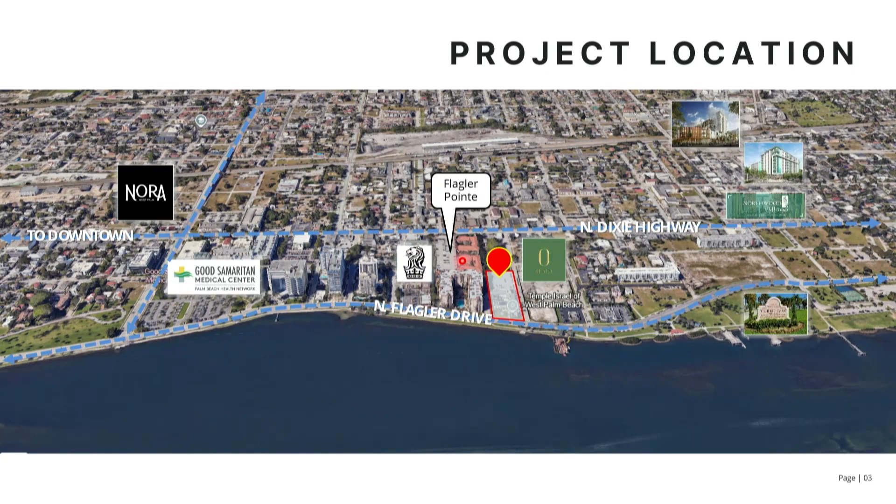So our request is a special review of a site plan for a 27-story multifamily building with 100 luxury residential condominium units, not apartments, together with a 5-story, 204-space parking garage, and 6 variances that I am going to walk through one by one with you after you've seen the architectural portion of it.

Here's the building, here's the 5-story garage. This is Pine Street, which runs east-west from Dixie to Flagler. It's a fairly narrow roadway, about 30 feet in width. This is Flagler Pointe, our neighbor to the south, and our neighbor to the north, just off screen, is the Olara project under construction.

Let me walk you through the site plan at a high level before I turn it over to the architect. The footprint of the building is here, but the footprint of the tower is under one-third of the project. Most of this is parking garage and mechanical. The resident and guest ingress and egress is off of Flagler. There is a loading and service ingress egress onto Pine Street.

I'll call your attention to this public open space. On the west side of the project, you'll notice a black hash line running down the center of it. Everything on the east side is part of the site plan you are considering tonight and is open space to buy up on the height. If you recall, CMUD has a height chart. You have a base height of 111 feet by right, and if you're in Core 1, you can buy up another 195 feet to a total of 306, choosing from a menu how you elect to do that—usually a combination of many of those menu items.

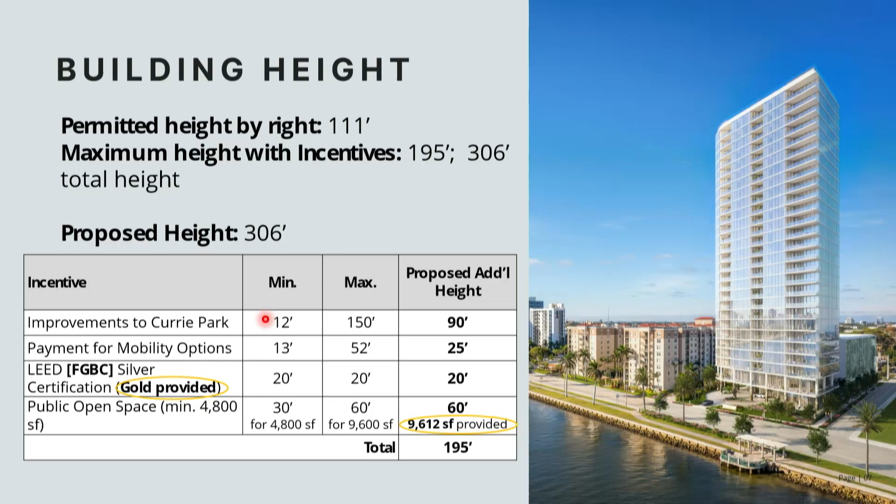And our public open space, as I already alluded to, in return for creating 4,800 square feet of public open space, you bonus up another 30 feet. We can only use the 60 feet, but we provided double the public open space.

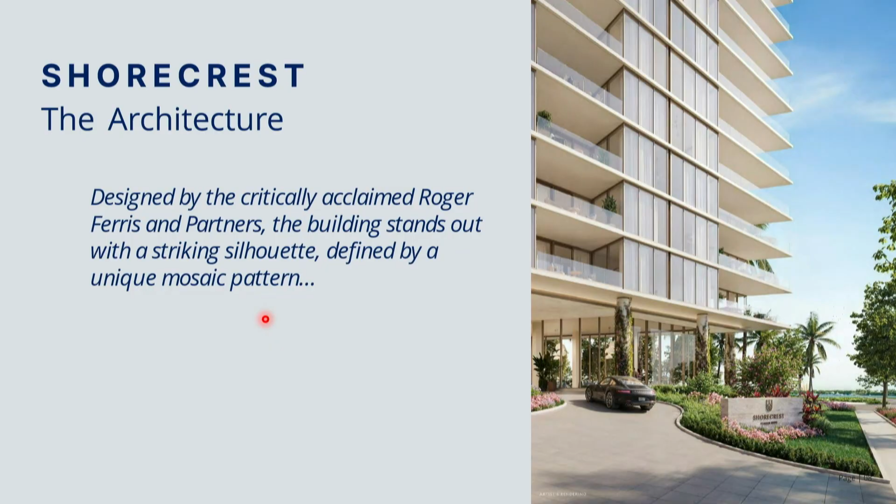So with that, I'm going to stop here and invite Breen Mahoney, who is the design architect from Roger Ferris, his firm, to walk you through the more interesting part of this, and then I'll come back with the much less sexy version of the presentation, which is walking you through 6 very technical variance requests. Thank you.

My name is Breen Mahoney. I'm the managing director for the commercial portfolio at Roger Ferris and Partners. We're the design architect for the project. We're working in collaboration with Revelta, who is the architect of record, and together we're putting forth the design I'm going to walk you through today.

The building itself, the project is comprised of 3 main components. Harvey touched on this a bit. In the forefront of the image here, you have a slender residential tower, that is the main component of the project that fronts the Lake Worth Lagoon. Just behind that, you have the second component, a low horizontal parking garage that fronts Pine Street. And the final component is the public open space, which also fronts Pine Street on the west end of the property.

The building as a whole is articulated as a sort of modified parallelogram in plan, with a gently curved facade aiming towards the southeast, a dynamic corner, as you see here in the foreground, anchoring Flagler and Pine Street.

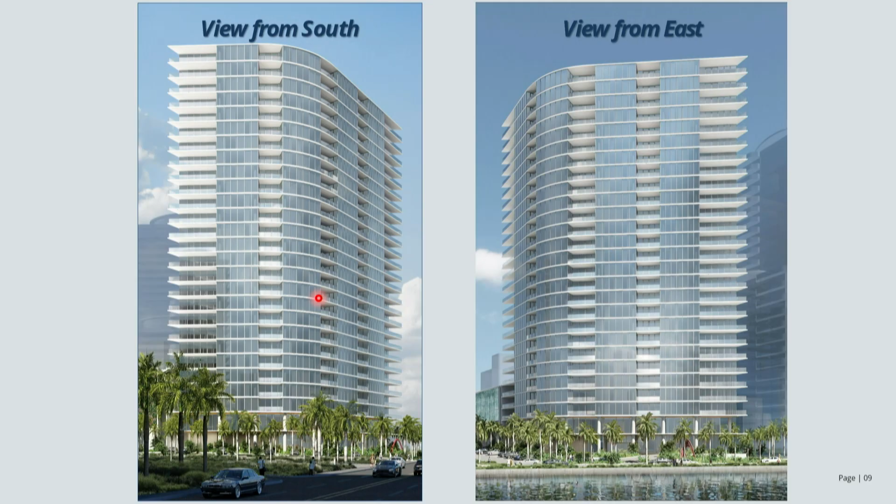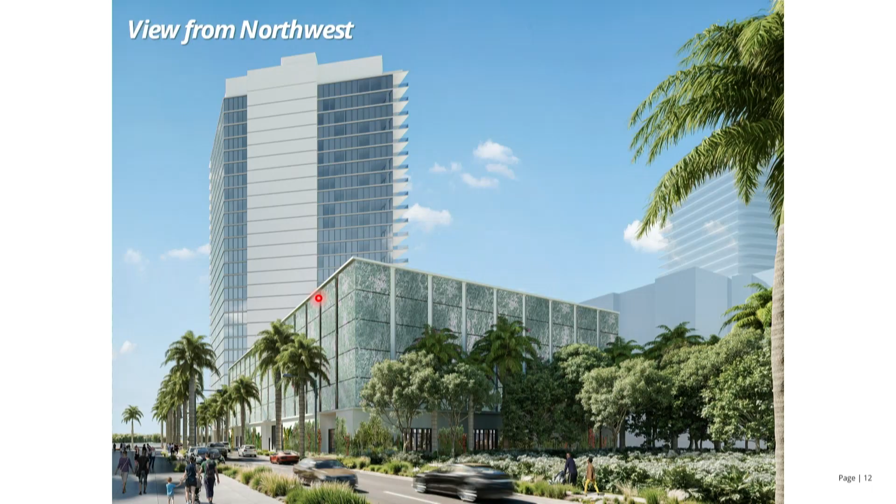This is a view taken on Pine Street looking out towards the waterway. In the foreground is the open space envisioned as a public amenity, as Harvey walked through, very lush in its landscaping. The garage itself is articulated by a graphic screen.

It's a mesh composition that has a fairly pronounced graphic image on it. The base floor of the garage is finished with plaster, as is the framing around the parking garage that holds the mesh screens. Landscaping continues down Pine Street in a couple different forms.

There is a ground plane of landscape, and of course the street trees mandated by the city. As you can see on the building face at the ground floor, we have a vertical expression of that landscaping in the form of vines, softening the way the garage lands on the ground.

What's also visible here in the trees is an active face for the back side of the garage, which is actually not loading or parking. There are some very targeted building amenity spaces positioned against that to promote a little more interaction between the building itself and the public open space.

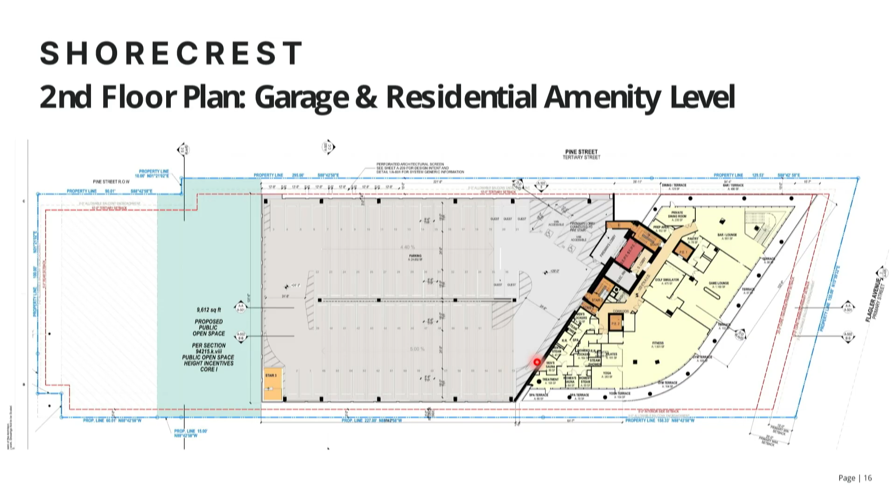Residences start on level 3. There are 4 residences per floor of the tower. One that anchors the northeast area of the plan, one that anchors the southeast area of the plan, and 2 in the center. Again, behind that, you see the layout of the parking garage.

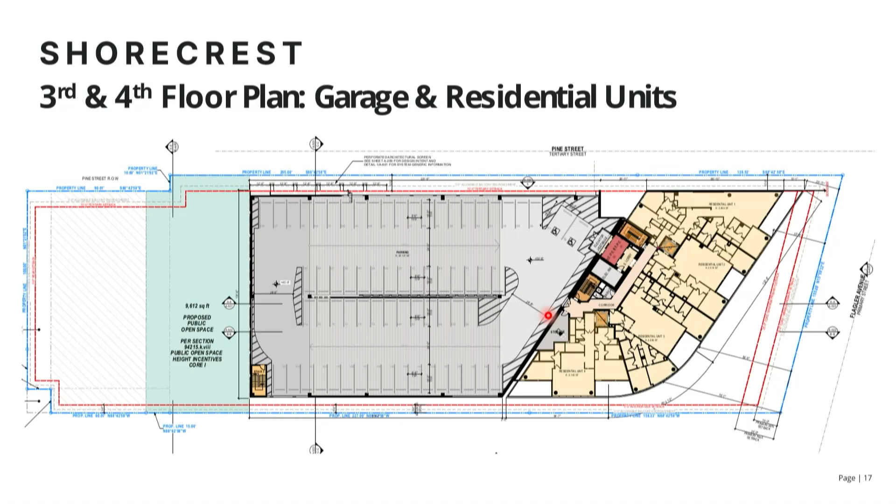The top level of the parking garage does incorporate some mechanical space that is tucked into an embedded mechanical well and is not visible from the public realm. It is screened on the two exterior faces of the building.

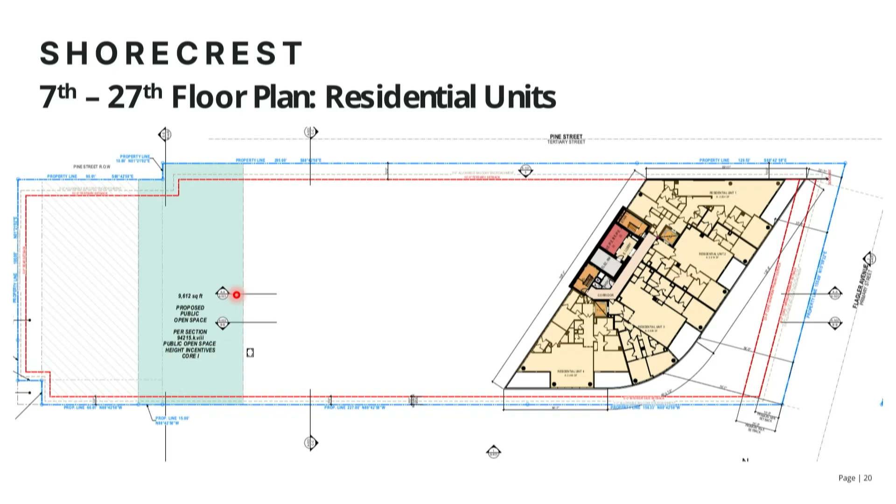The enclosed portion of the roof encloses things like air handling units, supportive spaces like bathrooms, etc. There is no internalized conditioned program space per the zoning regulations. I should also mention that the rooftop itself, as you see in the submission, is significantly landscaped and meets the criteria for the greening of an outdoor roof space.

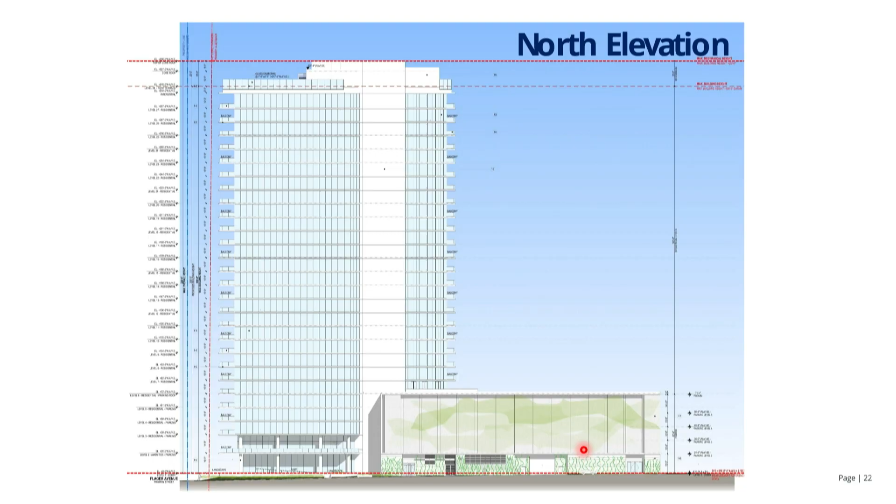I'll just go around the building here. The idea of the integrated terraces is in direct response to the nature of the zoning for West Palm Beach, creating active—not just in terms of programming, but in terms of the interplay of facade elements, recessing and projecting—to meet the criteria of the planar break.

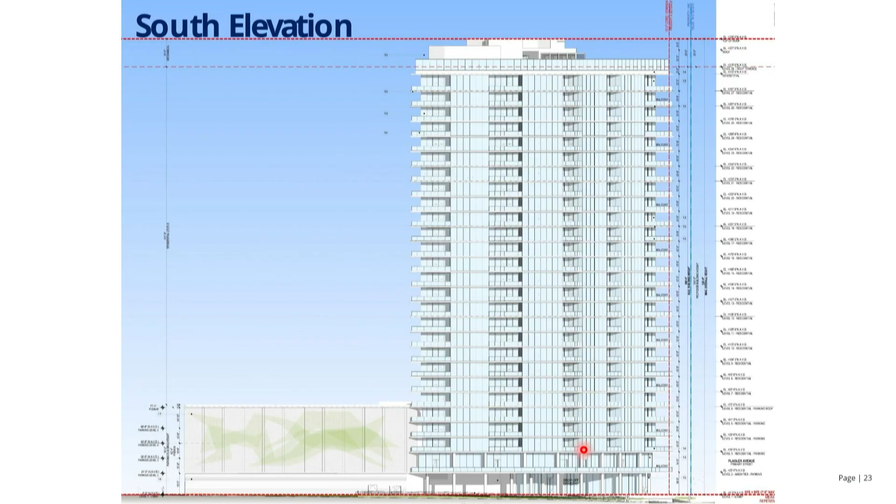I think that's me. Thank you very much for the opportunity.

Anybody have any questions of the architect?

I had one question about the material of the screen device on the parking garage. Sure. You said, was it a fabric screen? It is. It is a mesh fabric that is essentially stretched across the facade itself vertically, if you will.

It will be segmented. We're working with the manufacturer now to figure out exactly what that module is. And the limitations for the graphic expression are fairly limitless. Essentially, we're working on the design. What you see here, this idea of a muted, colorful abstraction to provide some animation on the street, that's the intent of it. And we'll work with the fabricator to translate that into a final design.

So this would be, I guess, like the public art component of the project with the—? No, this is just the design for the parking garage. The public art element, and I think Harvey can speak to that more directly, is not in this location. Okay, but this is not the final design, what you're representing? It is representative of that.

Just from the technology we have and translate, it is going to look more or less like that - kind of like greenery and vines. The idea is that we're quite sensitive; it's not implying actual greenery on the facade. That's not the intent. But we do want to reference something that feels organic, something verdant in coloration.

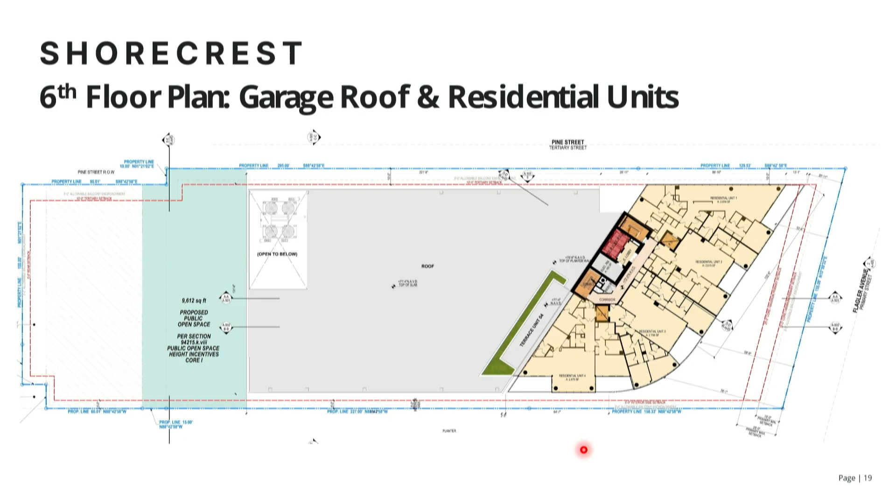It is meant to be reflective in terms of resisting a heat island effect, so it doesn't contribute to the neighborhood - not reflected in the sense of causing undue hardship on neighbors. Just want to clarify that.

Can you talk a little bit about the public space? Is it only accessible from Pine Street, or is there access from the building to the open space as well? Give us some detail on that.

The answer is yes to both. It is fully accessible off Pine Street - the two pathways come right off the sidewalk and bring you into the full depth of that space. There is also accessibility for residents of the building going out to that green space.

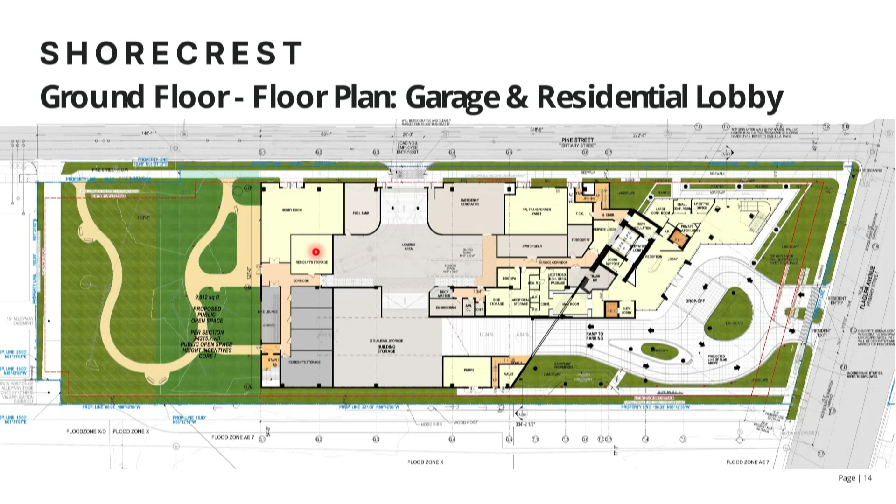In terms of what the park's going to contain, it looks like a walking path, some benches - are there any details on that, or is it even part of the specific requirement for what it has to have?

There is a much more in-depth landscape plan submitted by DS Boca. Here you can see the intent - it's a mix of scales in terms of vertical trees, lower planting elements around the perimeter of the park, and pathways, helping to create and form these outdoor spaces.

Is it like a 24/7 park - is it gated or totally open? I'll let the client speak to that directly, but in our design discussions there's been no desire to gate this - it's an open space.

And then maintenance - who's required to maintain that? Is it being gifted to the city, or is it still owned and managed by the property? That is my understanding, but that's not for me to speak to - we can have the owner speak to that. Harvey can answer that one - they will maintain the park.

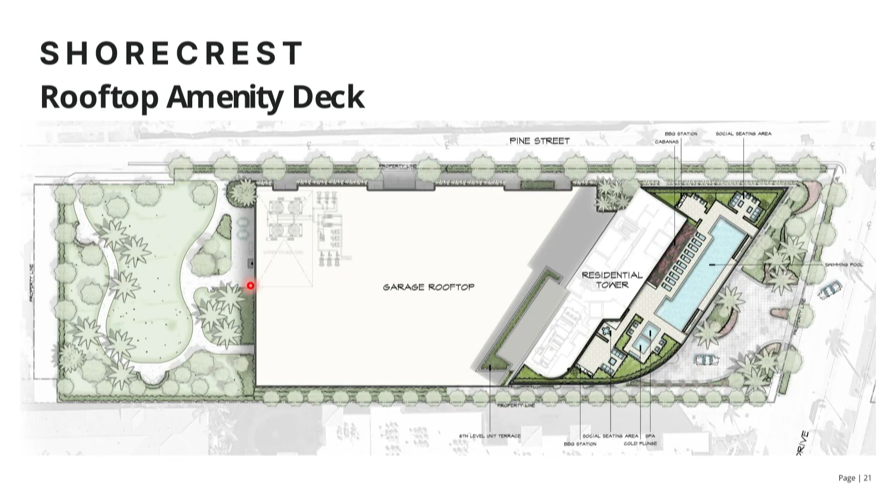Okay, no further questions. Great, thank you so much. Thank you.

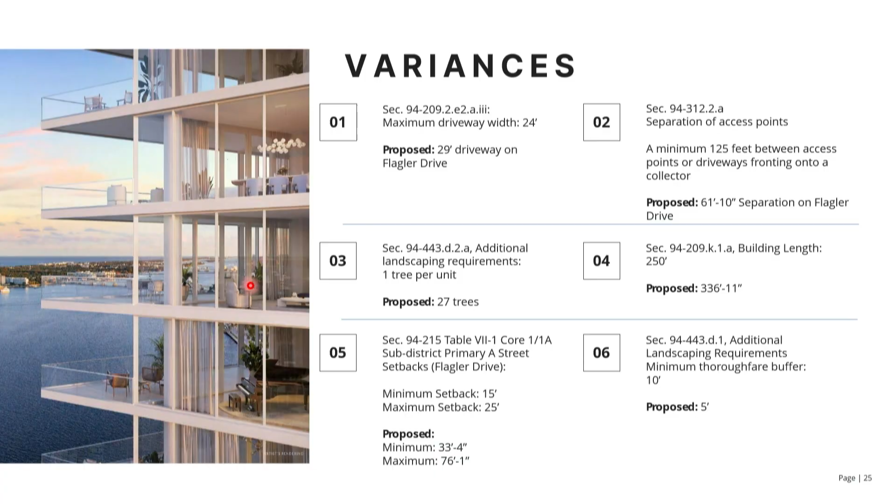Thank you, Breen. Now we're going to do maybe the less exciting part than looking at his beautiful images. So we have 6 variances. I'm going to walk through those one by one. And incidentally, a couple of them do not match up in the same order as the staff report.

If you're following the staff report, one of these is in a different order. The first 2, and I've clustered these together because they occur right next to each other, variances 1 and 2 are both along Flagler Drive. Variance 1 is a separation requirement from other driveway access points. The code requires, at least in this part of the city, 125 feet of distance between driveways. We have Flagler Point North access point here. Flagler Point, incidentally, has 3 access points, 2 on Flagler Drive, 1 on Dixie.

Given the distance of our property, which, as I mentioned at the beginning, is 155 feet in width along Flagler Drive, we cannot comply with all parts of the code. Let me give you an example. We have a 50-foot separation requirement from Pine Street and a 125-foot separation requirement from our Flagler Point's north access point. That's 175 feet of requirements. Even before we cut a driveway in, you mathematically cannot do 175 feet and 155 feet.

As you well know, this is not an uncommon problem. In fact, I'm not acquainted with any residential project on North or South Flagler Drive that didn't have a variance or a waiver for driveway separation, including all the ones that have come in front of you. Olara, the project behind us that runs along the south side of Pine Street to Dixie, the Ritz-Carlton, Family Church, Forte, South Flagler House, Bristol, all of them, the one that you approved last spring, the Coulter Perco project on South Flagler. I'm unfamiliar with any project on Flagler Drive that has met that.

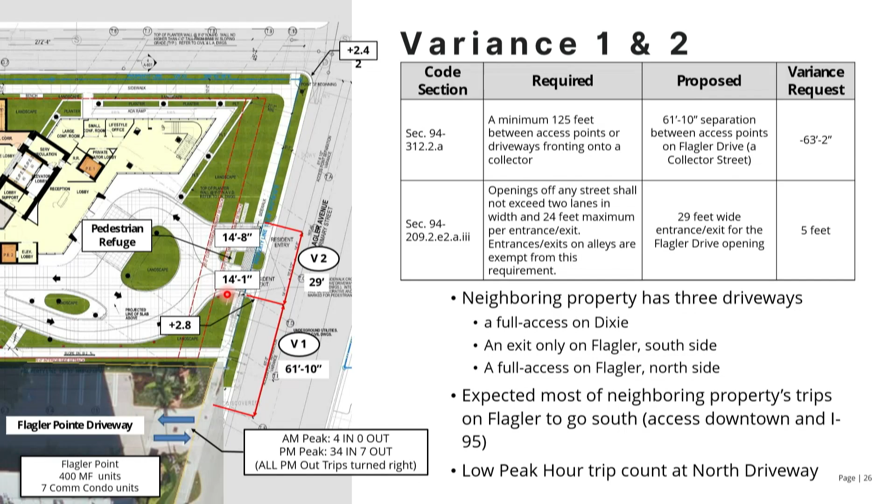And this is just reiterating what I already stated. And this is what it looks like. Breen gave you a similar image, but effectively you're at 2 feet here, and you need to be at 9 feet finished floor in that amount of distance. That's nearly impossible to do and meet the code sloping requirements if you did it up near Pine Street. Moreover, moving it closer to Pine Street gets you in conflict with significantly more traffic.

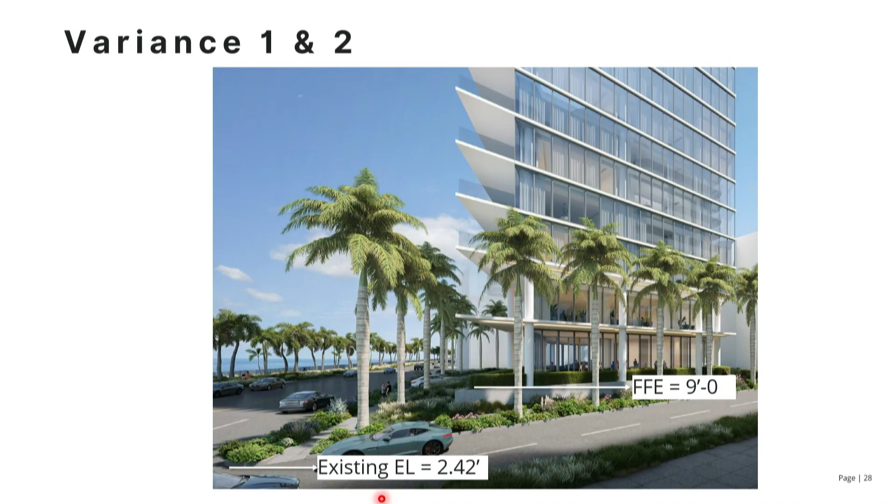Variance 3. The code states that for multifamily projects, in addition to your foundation landscape plantings, in addition to your landscape buffer, and in addition to your street trees, you are also required to plant 1 tree for every residential unit that you're proposing. So in our case, 100 residential units, 100 trees on top of those other 3 landscape requirements. That cannot be done in this amount of real estate. And I'm not aware of anyone who's accomplished that on any of these multifamily projects.

This is what it would look like—an orchard. We're proposing 27 trees. I'll show you where those are located, resulting in a variance request of 73 trees.

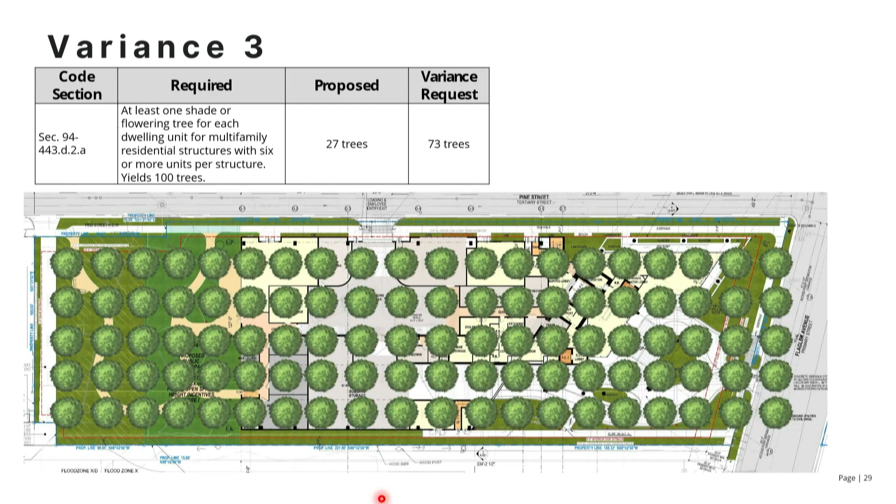Now you are probably wondering, how did everyone else comply with this? Absolutely no one, to my knowledge, has ever complied with this. Let me give you examples. The Ritz project needed 158 trees. They provided 46. No variance was required. Staff didn't require it—a different reviewer at the time, I believe.

Jeff Greene's project in CMUD, 152 units, did not have 152 trees. Again, staff did not flag this as an issue that required a variance. Olara has 458 units, not anywhere near 458 trees—again, staff never flagged it. The Spruce, just outside of CMUD and in Mud, 270 units, again not flagged by staff. And the project behind us on Pine Street, same issue. It's always been in the code. Not sure why it wasn't recognized previously. We seem to be the first instance in which that portion of the code has been applied.

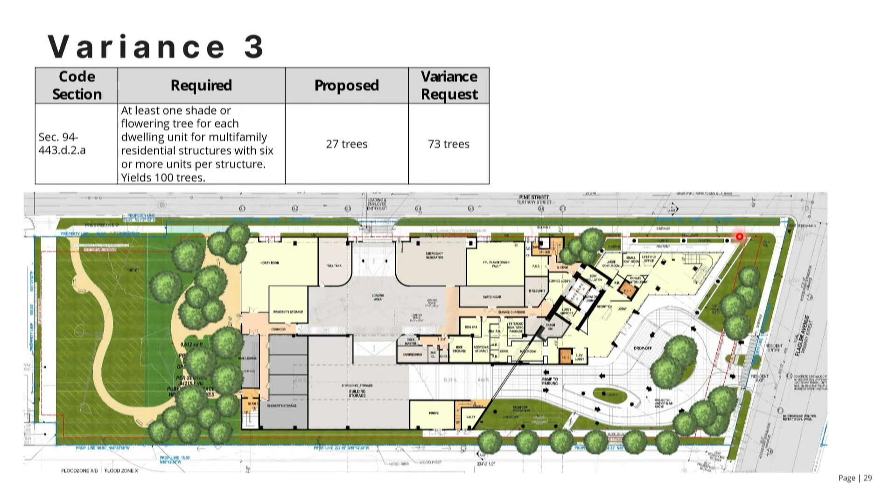But I want to show you why that does not work on this property. So our site plan only includes the east half of the public space, so we can only count these trees, even though, as you saw in Breen's image, there are trees here. We cannot count them because it's not within our site plan. So this is where we're proposing our 27, and these are substantial trees.

And this is the other landscaping. These street trees in the swale area between the sidewalk and the road are required trees, as are the foundational plantings and the landscape buffer between our neighbor. We have to comply with these additional trees in addition to those other three layers of landscaping.

So quite frankly, there's not the real estate to do it. If you look at where else we could do it, it would be in this area, but this is our utility area. If you put larger trees here, the root balls would interfere with the utilities and the canopies would overhang them. So we have very few opportunities, which I've outlined in orange.

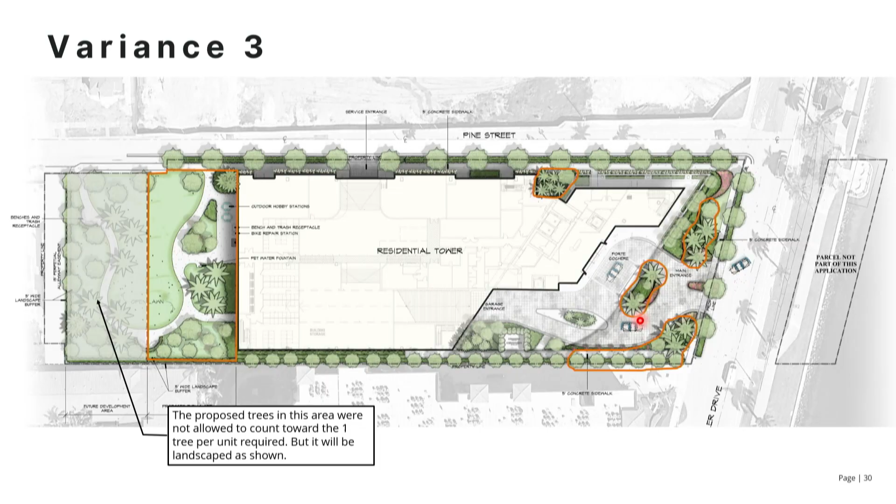The fourth variance we're requesting is a building length variance. CMUD limits building length to 250 feet. In some codes, if you put an inch of separation between buildings, you get to start the calculation over again. Many codes have a minimum distance — for example, our downtown has a 5-foot planar break before you start a new building. In CMUD it's a substantial separation requirement: 30 feet between buildings. Otherwise they are conjoined and made into one building.

Obviously no one has done that yet, and every one of our peer group projects in CMUD that you've already reviewed and approved all had a variance for the 250-foot building length.

But I want to make a distinction between the tower length and the garage length, because the overwhelming majority of this variance request comes from the 5-story garage. We had a design that actually met the 250 feet, but that triggered a taller garage. On balance, working with staff, it made more sense to seek this variance, which staff supports, push the garage down and squeeze it out wider. It preserves views for our neighbors to the north, Olara, and to the south, Flagler Point. So this seemed to be in the best interest of the entire community.

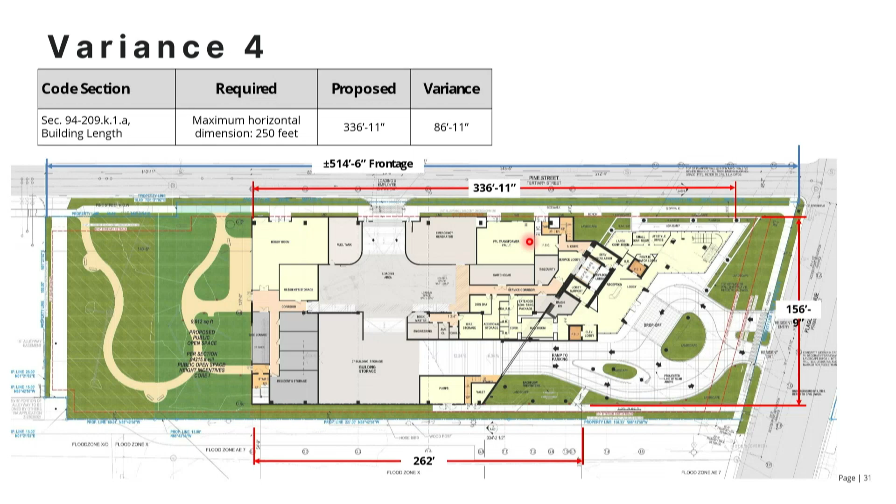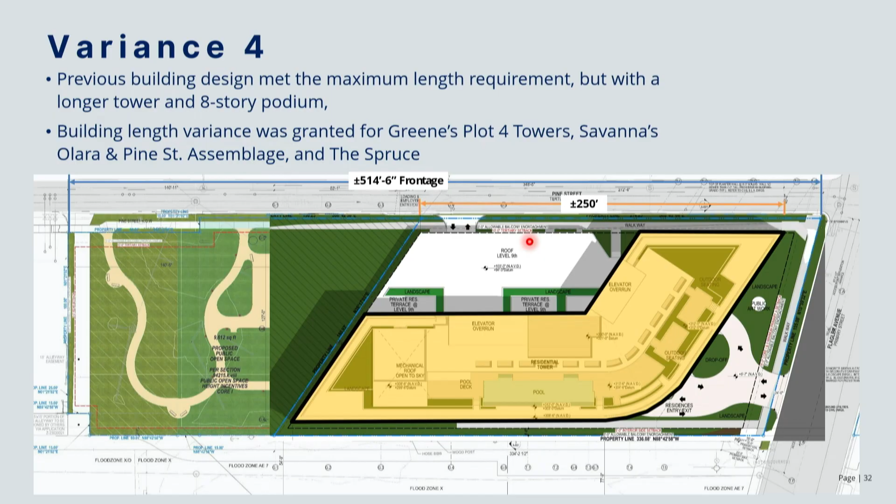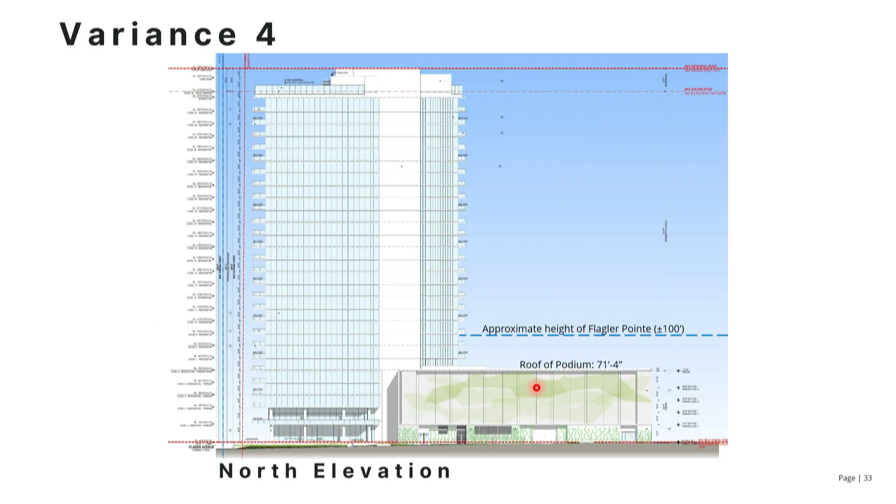This was the 8-story version, a much bigger tower, from when we had double the density and an 8-story podium. This is what it looks like as a 5-story, squeezed out in a horizontal fashion — it allows all of this area to now be open, call it 30 feet of openness above the 5-story garage that would not be there if we built the 8-story garage. Not to mention how inefficient it is to have a smaller footprint garage.

This is looking at it from Flagler Point, so that 30 feet would be somewhere in here. They're a 100-foot building, so we've given them 30 feet of height on the top.

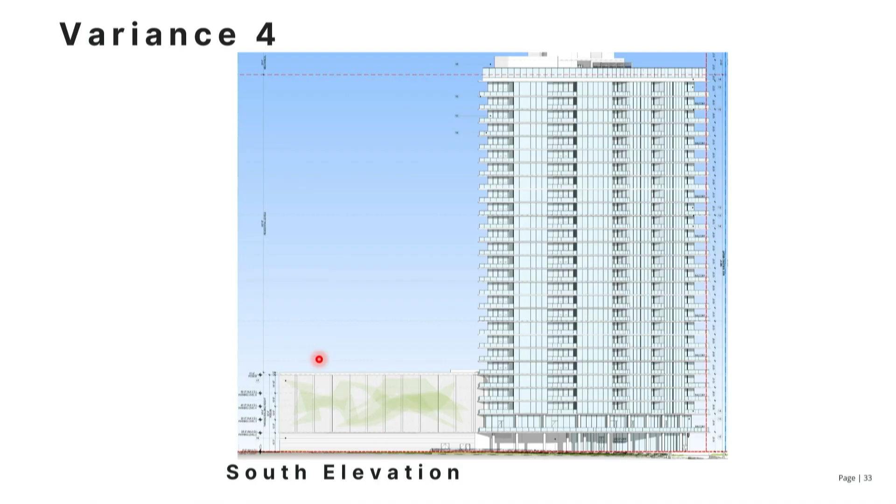Variance 5. Now this is a little confusing — if I lose you, stop me. This CMUD, when it was enacted, particularly for Core 1, was generally focused on Jeff Greene's properties to the north, which is the substantial part of CMUD and of the Core 1 zoning. That was envisioned as an extension of Northwood Road, 25th Street, heading towards the water, an urbanist form-based philosophy of buildings right up on the street edge with ground floor retail, almost like our downtown master plan. It certainly didn't contemplate being outside that area or being on an angle like Flagler Drive — it contemplated rectangles and straight lines.

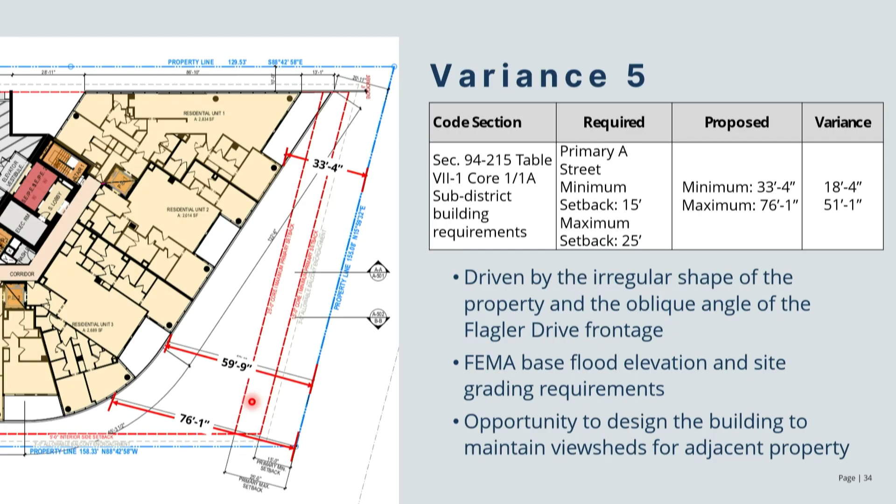And Variance 6, this is perhaps the most confusing to follow, so please stop me if this confuses you. Most properties, the property line is on the inboard side of a sidewalk, and the sidewalk and swale space out to the edge of road is usually in public ownership. Let me see if we can highlight this.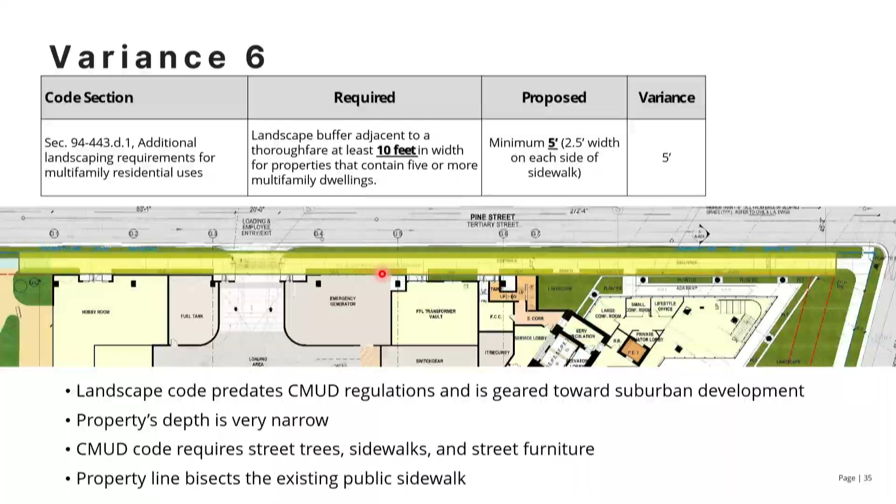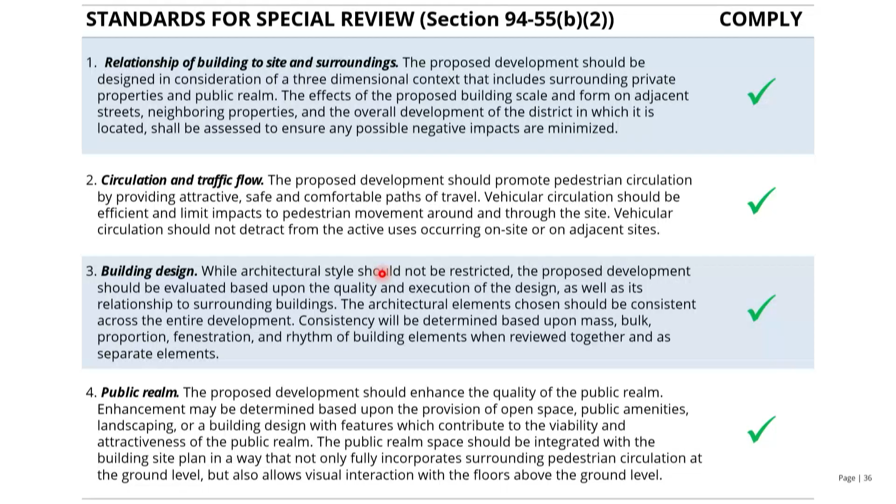So your standards of review for this evening, you have 2 things you're voting on: the special review, and you're the final arbiter of this. The standards for your review are found in section 94-55B, as in Bravo 2. We believe we comply with all of those standards, and staff concurs with us. Your standards of review for variances are found in section 94-38D, as in Delta, subsection 6. We believe we comply with all of these. I'm happy to go through them if you'd like, but in the interest of time, we'll come back to them if you have questions. Staff concurs with that.

We've had substantial public outreach over the last 2 years. As you know, this is just our outreach with our neighbor to the south, Flagler Point, because they were the most affected. They were the tallest building in the neighborhood for 30 years, and now they're going to be the shortest building in the neighborhood because they're being built all the way around.

And as you can imagine, that engendered some concerns on their part. So we met with them more frequently, including twice in the last couple of weeks, to share not only the rezoning concept originally, but all iterations of our site plan, construction management agreement, so they know when we're building, how we're screening, et cetera, so as to not disrupt their lives or minimize it as much as possible. We've done public outreach with our other neighborhood groups, Pleasant City to the west, all the Northwood districts to the north, and of course our Chamber of Commerce.

And we're delighted to tell you that the overwhelming majority of our neighbors support us, as they did for the rezoning 2 years ago. Staff is recommending approval of our site plan as presented this evening, with all 6 variances as presented this evening. They did attach some conditions of approval, and we're in agreement with all of those proposed conditions. So with that, Mr. Chair and Planning Board members, we respectfully request your approval of the project. We stand ready for questions.

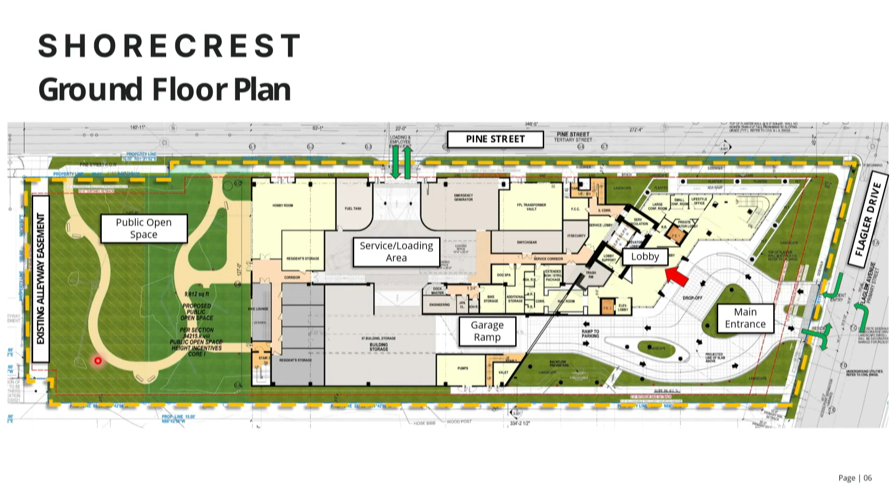Yeah, but I think Sam's asking, why did we not include this in the site plan? Do we know why that was not included? So we're assuming 9,600 square feet of public open space to count under height incentives, right? Yes. And I'm not sure what that is.

Mr. Fish, why don't we get back to you with an answer on that? I'm really not sure why it was excluded from the site plan.

The developer will initially, and once turnover to the association occurs, it'll be the association - very similar to what the Bristol has on the north side, that open space along the seawall. It's their obligation to maintain it, light it, secure it. That would be our obligation.

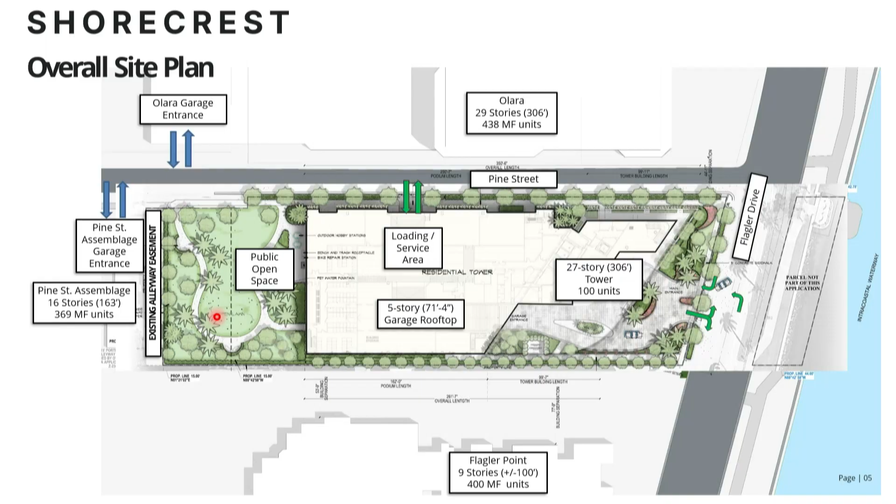The alley itself—why that exit point is there—I'm not sure the applicant has a picture, but I think I have one. Let me show it.

So the project to the west of this that was approved has an existing alley that runs east to west from Dixie Highway all the way over to the edge of the property and actually goes past it. You can see that little indent there by what appears to be a parking lot.

So the applicant to the west requested to abandon that alleyway. The issue was they were required to pay the value of the alley to the city. They did not do that, so that approval went away. So now that access easement that you saw on the park drawing has to remain. There's one there now so that the alley is not a dead-end alley.

That is why that's there. If that alley ever gets abandoned, then this easement would be abandoned and the current applicant, Related Ross, would be able to do something on that piece. So there's a lot of things on that western part of this property that cause it to currently be not a viable developable piece.

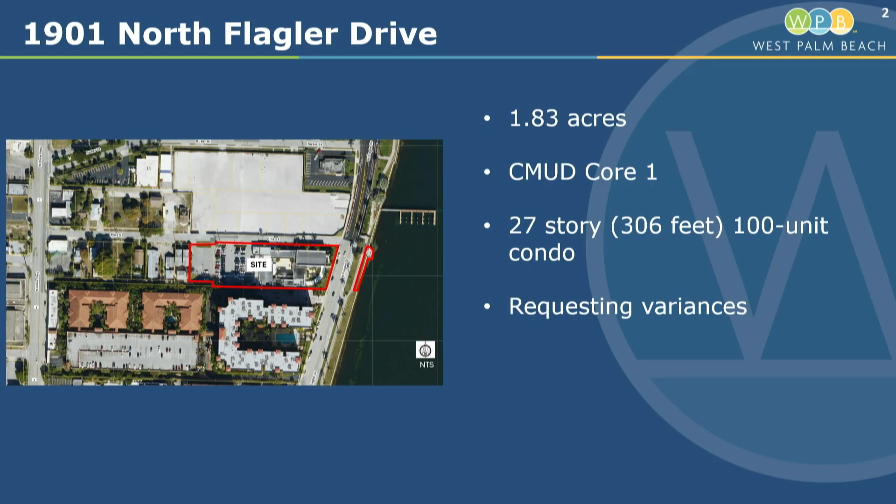However, the applicant could come back in and develop this in the future. Obviously, it looks a lot better with the path going in and out and all that landscape there. But in order to preserve the ability to develop that piece in the future, and then not have to rip out the trees that they've shown on the landscape plan, they're not counting those as part of the 100 trees that they are required to have.

If the applicant wanted to, because they are required to sign a perpetual public open space agreement for that area, maintenance and everything else, if they wanted to include both halves of that with a dashed line there and restrict that forever as more public open space, then they could count all those trees that were put on there. But that is not what was expressed to staff. Therefore, the trees on that piece can't count towards meeting the tree count because they could go away at some point. So that is an option the applicant has, but did not choose to pursue.

As far as some of the other items, the staff does agree that the variance requests and the variance standards have been met, as also the level 3 special review standards. That's all outlined in the backup material that you have.

I do want to point out that, and I think Mr. Oyer touched on it a bit, there are two variances that are a little different, and they're actually less variances than were in the backup material. The first is the length of the building. I have a snazzy image. Let me go get you a snazzy image.

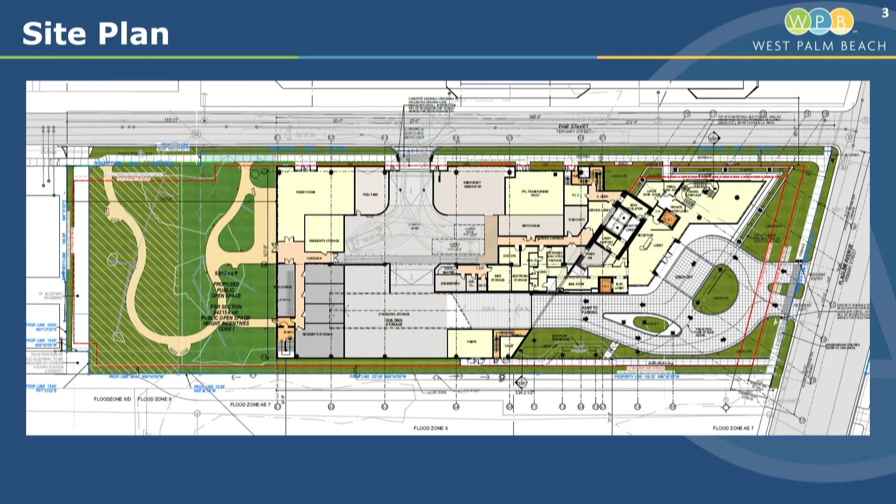So this is actually the north elevation, and the 336 feet 11 inches is measured from the furthest west projection of the garage to the face of the building. Originally, in the planning board report, the applicant had stretched that out in their measurement to include the balconies, but the balconies are not part of the building. And as was discussed, as the building slopes backwards, that actually is the furthest projection. The little balconies there are just a little point, if you remember seeing the elevation drawings and floor plans. So there's actually less length of building than what was listed in the report, so it's less of a variance required.

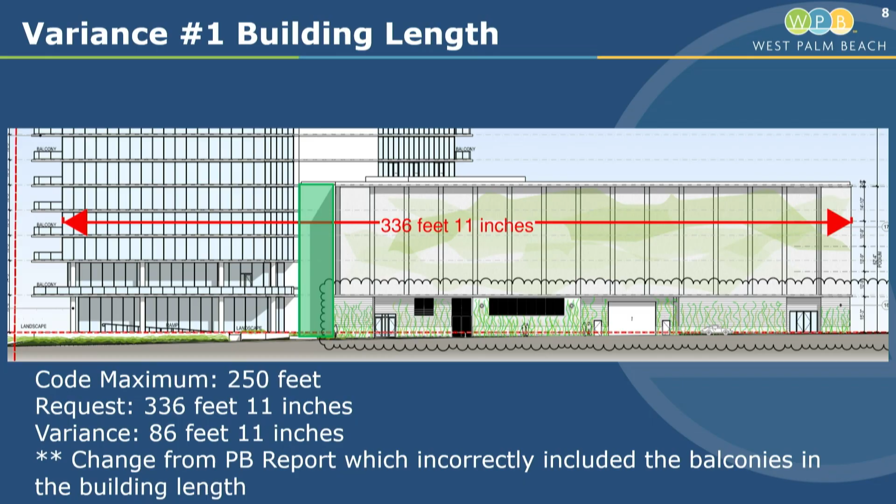I do want to point out, I know Mr. Oyer touched on it, that it is broken a little bit, but this area here that I just popped up in green is actually a recessed area from where the building slopes back. I don't know if you picked up on it on the site plans. So it is not a flat projection at 336 feet 11 inches long. It is less because the garage is built separately, even though it's connected from the tower where it slopes back there.

The other variance I want to point out that's a little different from what's in the report is the distance separation. The applicant's engineer was able to tweak it a little bit and look at that driveway location, and they were actually able to move the driveway one foot further away from the property to the south, from the driveway. So in the backup material it's 60 feet 3 inches, and it's actually 61 feet 10 inches away. So it's less of a variance than was previously requested.

So those two are the two changes from the variances that you will be voting on, and I just want to put that in the record.

I don't have anything else other than to say, yes, staff supports this. We did find that the variance standards and the special review standards are met.

Can you repeat that distance again, Eric? In the backup material, you see the little red lines, that's the distance separation, and Mr. Oyer had mentioned that because of the geometry of the lot and those code requirements, there's physically no way to meet that. It had been 60 feet 3 inches in the backup material, but the applicant was able to shift that driveway a little bit, so now the variance is at 61 feet 10 inches, the driveway separation is 61 feet 10 inches, so 1 foot further away from the driveway to the south than what was in the backup material. I just want to point that out.

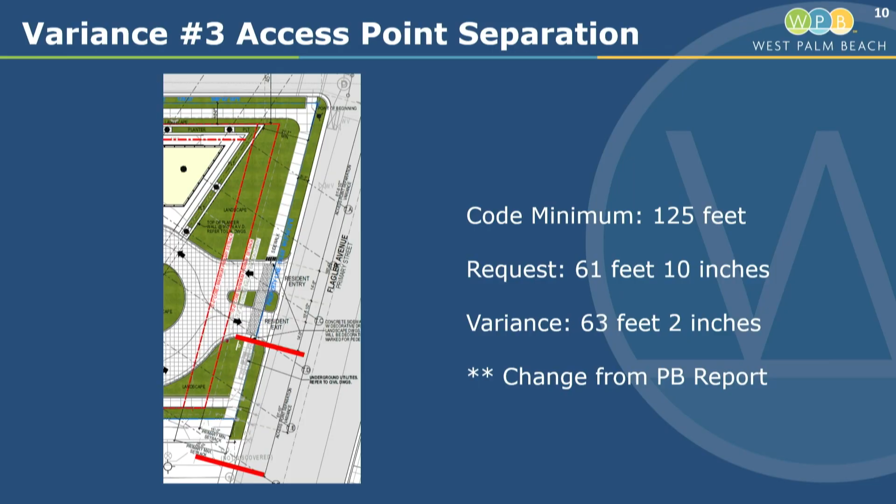Any other questions of staff? Just going back to the west component for one last question. So as a hypothetical, that last 50 feet of the parcel could potentially be sold and repackaged with an adjoining site in the future? Is that what you're telling me? Yes, it could. Off the top of my head, I don't think there are any actual variances that are affected by the distance or the square footage of the lot. So yes, they could theoretically sell that parcel, that piece off the back. They would have to go through the subdivision process. Staff would have to evaluate to make sure that all the components worked. Obviously, that walkway would have to be shifted a little bit through an amendment, but yes, it could be sold. It could be developed with a building as well, would have to meet the Currie Mixed Use District Core 1 standards, but yes, it could be sold off.

Thanks, Jean. No questions, Sam, or staff? What we were just talking about here - with all the plans we're looking at showing everything landscaped, there's a walking path, there's lighting, but it's not actually part of... I guess I've never seen that before.

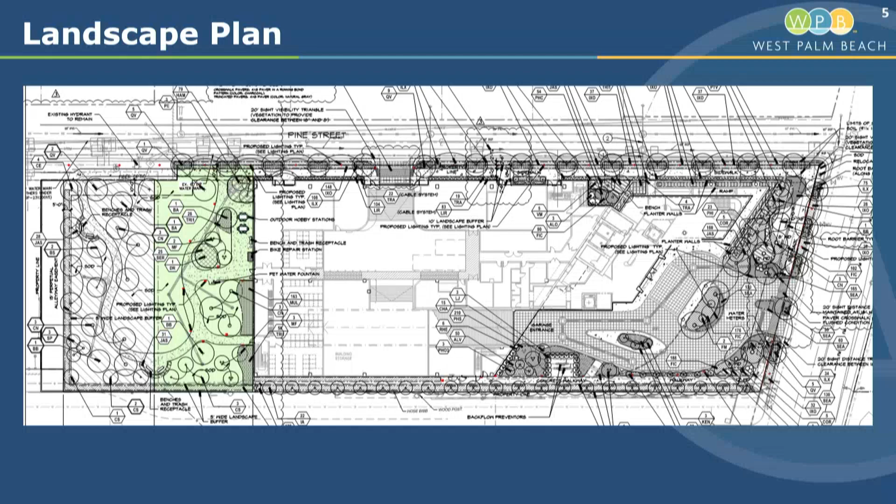Okay, all right. Anything else? Any other questions? Anybody want to make a motion on page 31 for the variances first?

I move that the planning board grant the variances associated with planning board case number 1955C, a request by Harvey Oyer of Shutts and Bowen on behalf of Temple Israel of West Palm Beach, for variances from sections 94-209, 94-312, 94-215, and 94-443 of the city's zoning and land development regulations as listed in the staff report dated December 16, 2025. This motion is based upon the testimony presented at the hearing along with the application submitted, and the staff report, which constitute competent, substantial evidence. The planning board hereby makes findings of fact that the application complies with each of the applicable criteria in Article 2, Section 4, Section 94-38D6 of the City of West Palm Beach zoning and land development regulations.

You have a second? I'll second.

Conditions, do we go to the second one too, if conditions are imposed? Because we're talking about public open space? That would be the next one. Conditions relate to level 3 approval. Okay, we'll do the next one, okay.

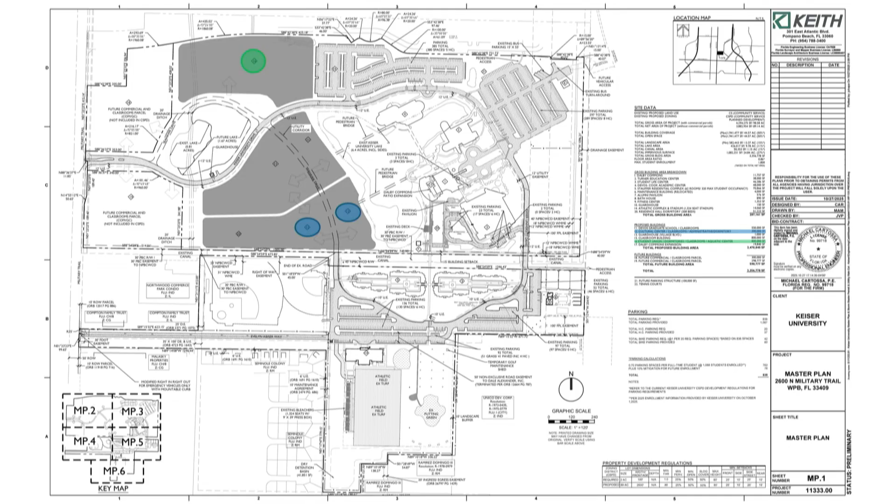With respect to the amendments, staff has added a couple development regulations applicable to the campus. One of them is here. My client has no concerns with those additional development regulations. What I want to spend the most time on is the amendments to the development regulations within our development order for the CSPD that apply to parking rate.

As background, the code required parking for colleges and universities requires 1 space per student station, 1 space per faculty or staff member, 1 per 4 seats in places of assembly, and 20 parking spaces for visitors. As applied to Keiser University, the code results in an excess of parking compared with actual demand. A big part of the reason is the requirement for seats in places of assembly, and the current parking code does not allow for reductions in parking when you have concurrent uses, like you do on a campus. Most of these assembly places serve the student population already on campus. They don't need to park 2 cars for 1 person.

I'll also note that variances from the parking requirements are expressly prohibited in your code. There is a long history of this campus working through solutions to address this excessive parking requirement.

The first that I'm aware of is in 2012, when Northwood University obtained approval for 2 development regulations that modified the code required parking. So the development regulations in place today allow for 1 parking space per 2 student stations rather than 1 for 1, and 1 parking space per 2 adjunct or part-time faculty members rather than 1 per 1.

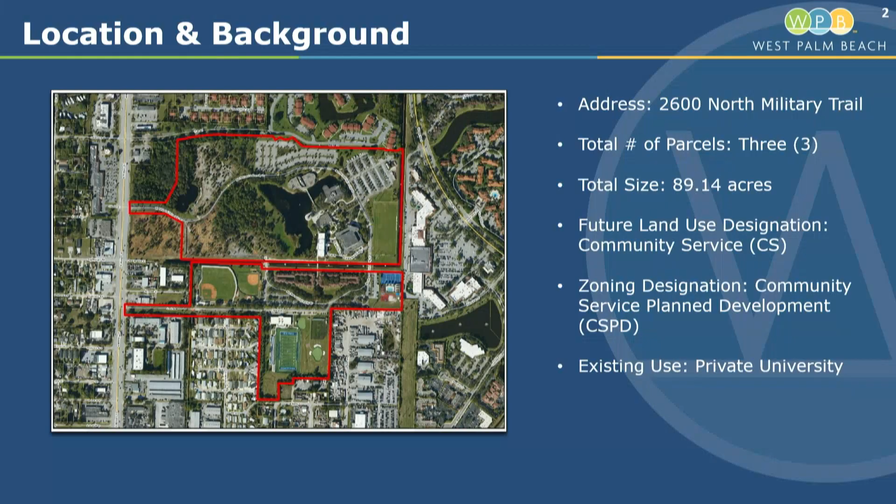The applicant's agent thoroughly presented the request for tonight, so I'll move forward. Staff finds that the request complies with the amendment standards found in section 94-32A of the City Zoning and Land Development Regulations, and complies with the site design qualitative development standards found in section 94-35C. Therefore, staff recommends approval with conditions of the subject plan development major amendment request.

As the applicant's agent stated, staff is recommending the conditions of approval with slight minor modification to condition 1A-I, to add the wording 'full-time on-campus' between '1,400' and 'students.' And the minor modification to condition of approval 1E-I, to add the wording 'full-time on-campus' between '1,400' and 'students.' That concludes staff's presentation.

Thank you so much. Any questions of staff? If not, would anyone from the public wish to be heard? One at a time, please. If not, we'll bring it back to the board.

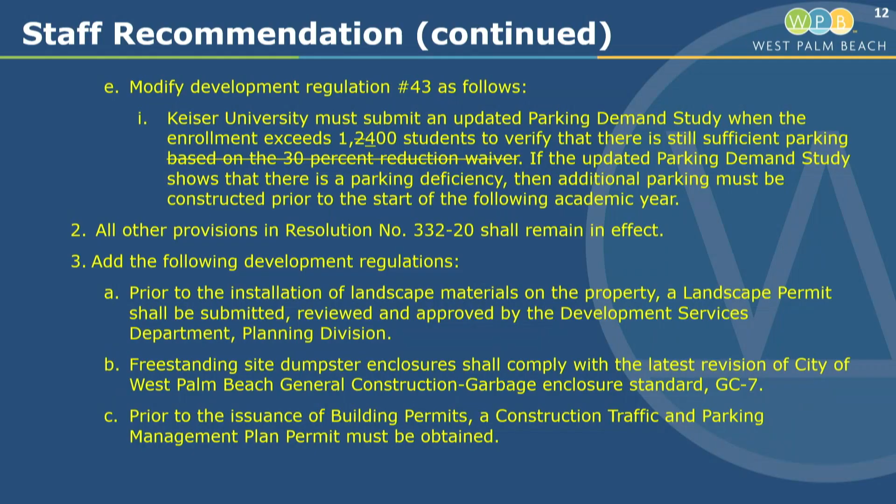Do you want me to read it? No, not necessary, we're just going to add those words. Is that good enough, Sam? Yeah, okay, so I would add that - she'll clean it up in the minutes - with the amended words on our screen related to on-site students, full-time on-site students. Thank you for that, and it was accepted and agreed by the second. So we have an amended motion, an amended second.

All those in favor signify by saying aye. Aye. Any opposed? Passes unanimously. Thank you so much. That then brings us to code revision cases, of which there are none. Other business, unfinished business, new business. If not, we stand adjourned. Thank you, everyone.